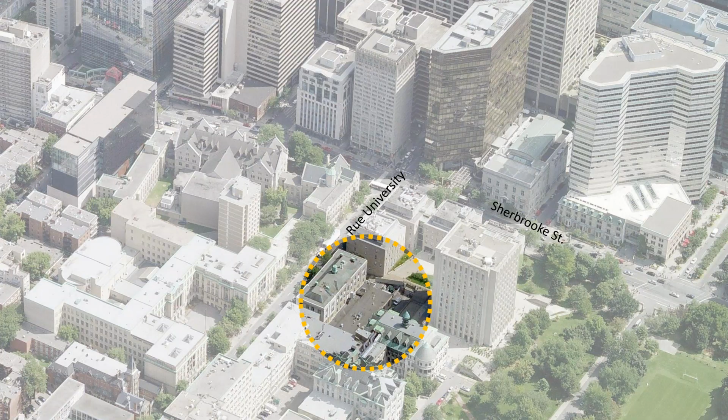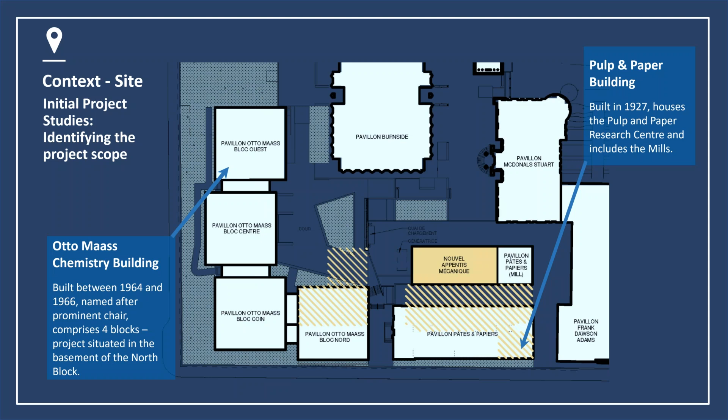This gives you an overview of what we were looking at. On the one hand we had the Otto Maass chemistry building. It's actually not a single block, it's 4 separate towers, built between 1964 and 1966 and named after a prominent chemistry chair at McGill University. Then we had the pulp and paper building, which was built in 1927, and that houses what was formerly the Pulp and Paper Research Center, including an annex known as the Mills.

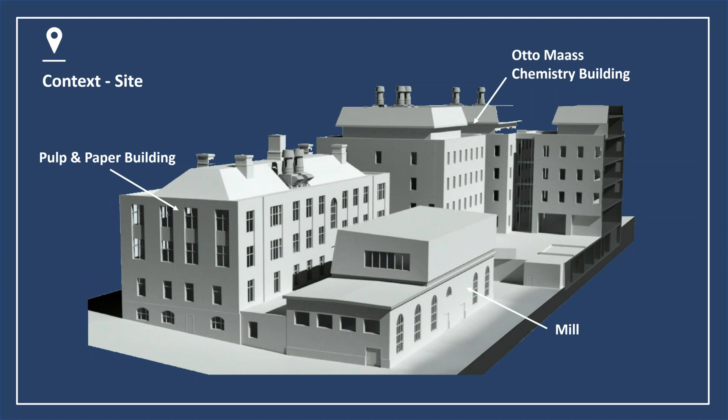So this gives you a sense of, from a volumetric standpoint, what we were looking at, the relative size and shape of the buildings. And ultimately what the issue was is that the site itself was in a valley. And so for the purposes of managing air intake and exhaust, and also the view around, it posed particular challenges in terms of how we were going to make a reasonable intervention and also ensure that the labs were interesting

livable spaces. It should be said that the space that was designated for the labs was actually on the basement level. And so in addition to the exhaust and intake issue that we were trying to deal with, we were also looking at ways of incorporating interesting daylight and view opportunities from a basement level, so it didn't feel as oppressive down there.

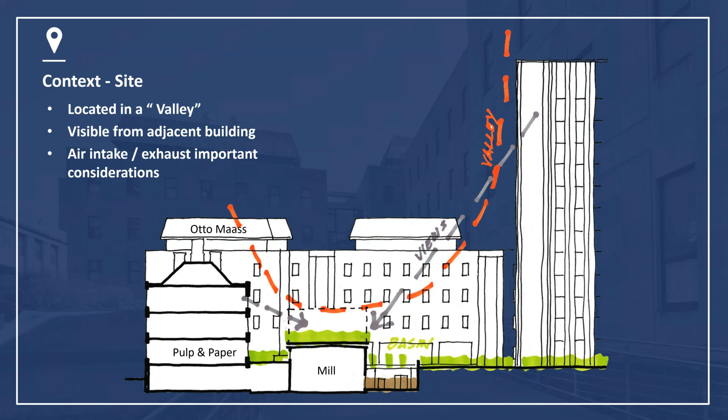The space that was allotted was the last remaining space in the building that had not been upgraded or renovated through the years. So the existing labs were in extremely poor condition. And there were more than a few deferred maintenance issues that we had to deal with. So this just gives you a quick sense of what the situation was prior to construction.

Prior to construction, this is just a general overview of what we were looking at. This is in the pulp and paper, in the Mills area, where we have one lab that had some interesting fenestration, but by and large, we were in a basement.

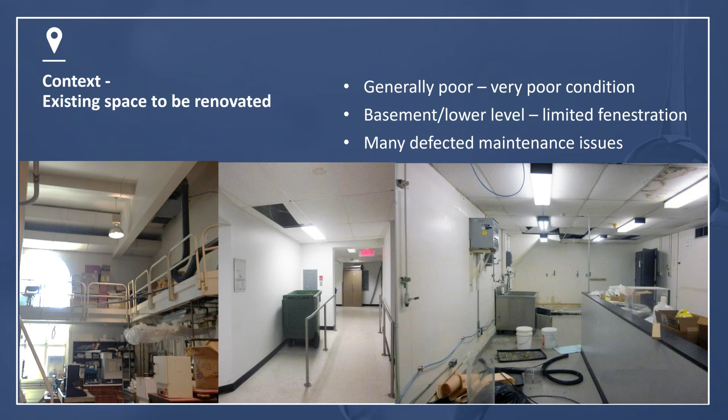So looking at the project itself, there were basically 3 areas of intervention. In the mill, we were looking at incorporating new mechanical space on the roof. We basically did a full upgrade on the exterior envelope, and it was a major renovation to the existing lab.

In the pulp and paper building, we incorporated new exhausts on the roof. There was new mechanical equipment in the existing penthouse, and new vertical distribution of the mechanical services throughout the building, focusing specifically on where the project started, the renovation of existing labs.

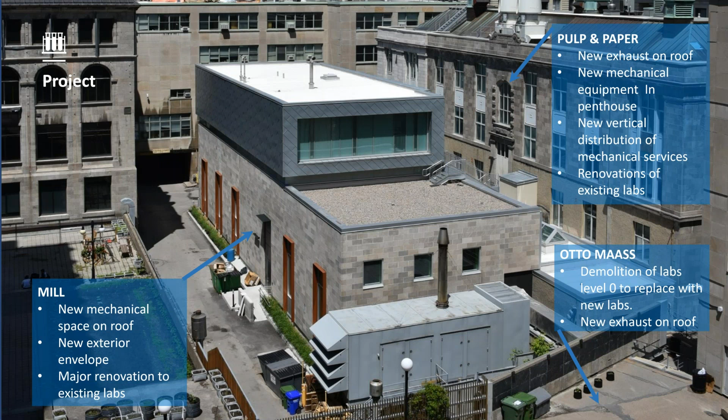And then finally, on Otto Maass, it was a wholesale demolition of existing labs on the level 0 space to replace those with new labs, and then there was the creation of new exhaust on the roof.

So in plan, just to get an orientation of where we were, this is all level 0, and so to the left, you have Otto Maass. We were basically having interventions on roughly 40% of the floor area, and then over on the pulp and paper and the mill side, we were doing a fairly significant renovation over most of the floor area.

It should be said that the challenge of this project was that the existing labs or the adjacent labs needed to be in continuous operation. So we were managing a construction site and continuous operation of wet labs throughout.

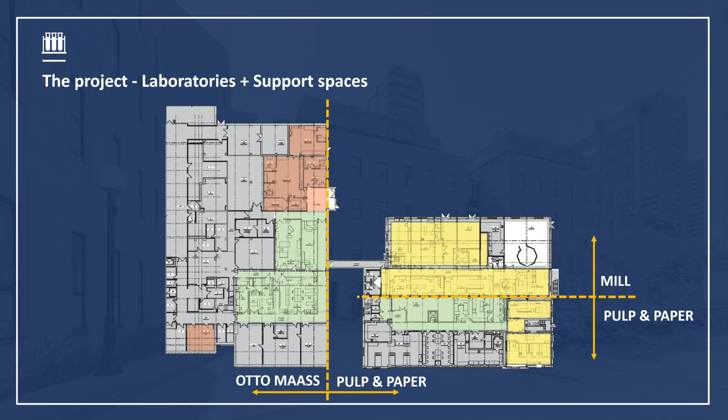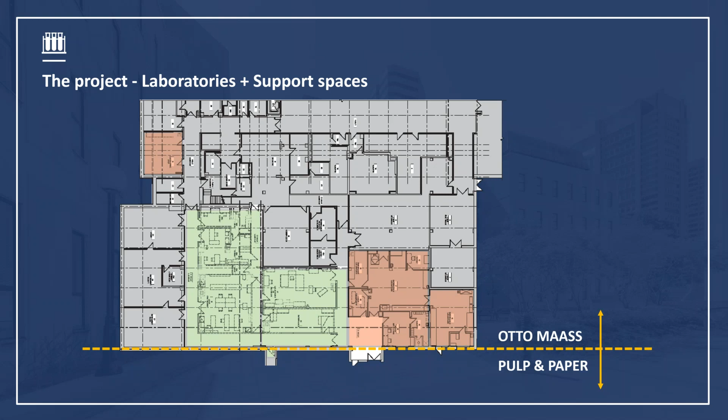More specifically, on the Otto Maass side of things, the segregation in this area was a little bit more straightforward in that the building zone versus the zone of intervention were more distinct. And so we did not have as many issues in terms of separating the ongoing use of the building with the renovation work.

On the pulp and paper and the mill side, it was much more complicated because we were touching a more significant portion of the work, and we were also intervening in areas where we were having to manage building access. And so things like dust control, proper ventilation, proper pressurization, building services, continuing with sensitive lab work directly next to a construction zone were all problematic.

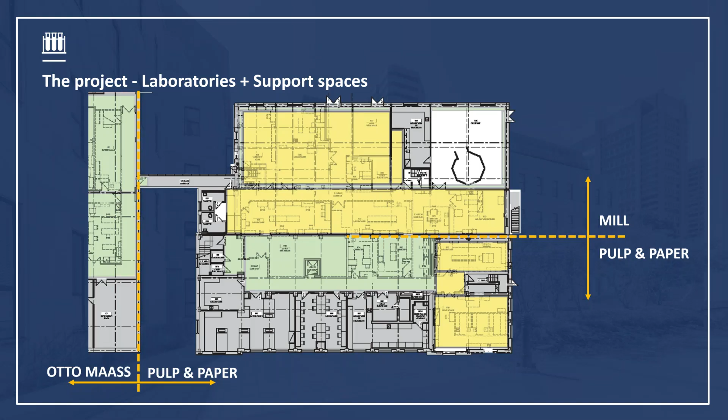There were some key project goals. We were looking for LEED Silver level certification. They were also looking to maximize energy efficiency, make sure that there was a good amount of adaptability and flexibility for the laboratory spaces. Because the lab spaces were located in the basement, ways in which we could increase the

availability of natural light. From a user standpoint, they were looking to make sure that the spaces would support interaction, which was a key goal of the research chair, promoting interior views, and there had been a hope that we would have access to vegetation and green space, which was sort of the blue sky thinking at the beginning of the project.

The challenge, because of how broken up the spaces were and where the labs were located, was establishing an appropriate LEED project boundary because we were operating in multiple zones. And so the initial strategy was to sort of delineate those zones. And in terms of the mechanical electrical systems, for the purposes of how we would approach LEED, we were simply thinking of doing a proration of the overall mechanical spaces versus the overall space.

The challenge was that while we decided to pursue LEED certification as a commercial interior, the way in which the mechanical systems were set up on campus, we had district systems that we were dealing with, and so ultimately, in consultation with the Green Building Council, we settled on a strategy of basically looking at only incorporating the terminal units as part of the LEED certification process.

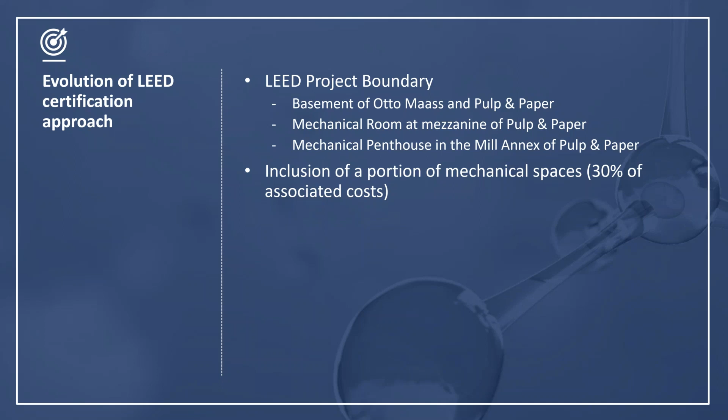The other challenge that happened along the way is that from the client perspective, this started off as a labs renovation, requiring additional services in support of those labs, but it was also seen as an opportunity to improve and to upgrade the mechanical systems throughout the building. And Pierre-Luc will get into that a little bit further later on. But ultimately, it was a bit of a domino effect in that the labs required an upgrade of certain systems, and that just led bit by bit to the overall upgrade of the systems throughout the building, which had not actually been touched throughout the many years of ongoing renovations in the building.

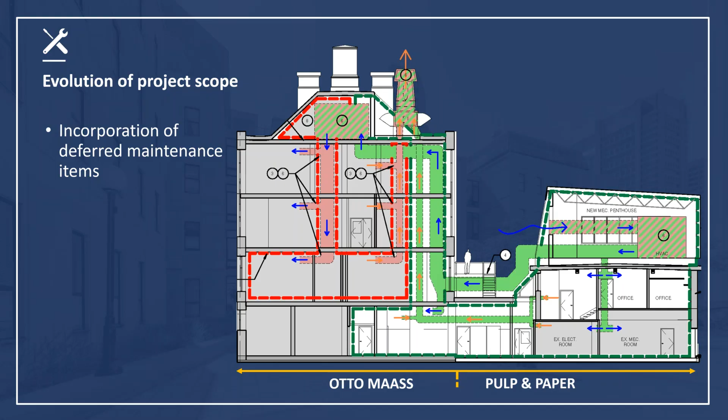So moving to looking at design strategies, natural light was our first consideration from the architectural perspective, and working with the challenge of being on the lower level, also working with the challenge of being in the valley amongst other buildings, we incorporated a skylight feature to improve the quality of the lab spaces. And so with that skylight, which is located in the link between Pulp and Paper and Mill, we were able to provide natural daylight to 85% of the lab area within the Pulp and Paper and Mill building.

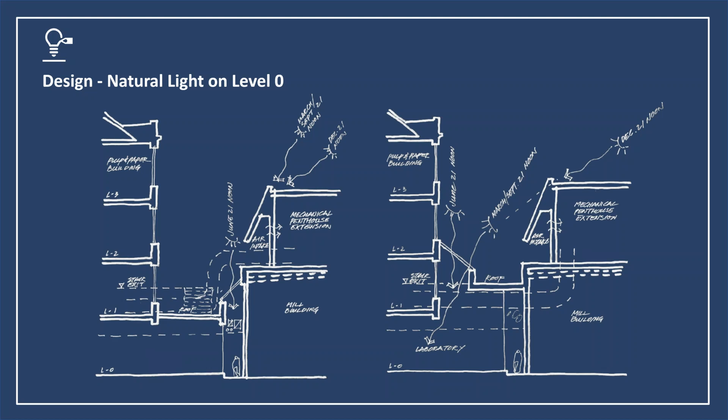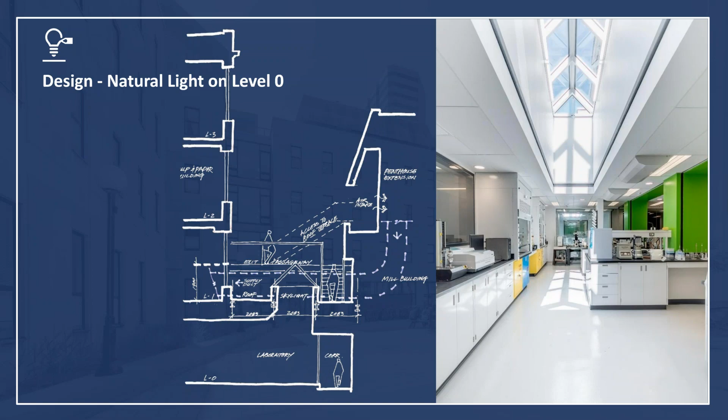We considered a similar strategy for the Otto Maass sector, and so this gives you a sense of what we were able to achieve. However, for reasons of technical and budgetary constraints, we were not able to implement it. The other issue that we had to spend a lot of time trying to assess was how we were going to manage the fresh air intake and the exhaust at the higher level. So I think I will turn it over to Pierre-Luc at this point.

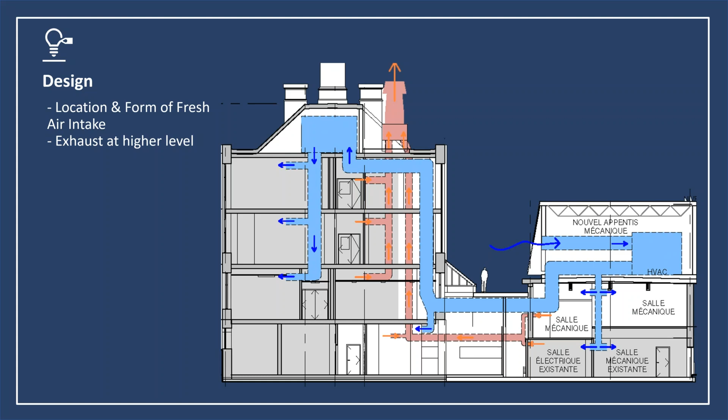Thank you, Deirdre. So in terms of electromechanical, the first thing to consider, as Deirdre mentioned, is that we needed to keep all the existing labs and offices and classrooms in the Pulp and Paper building operational during all of the work. This was really important for us. And as an analogy, it's like asking you to replace the motor of a car going full speed on the highway, and I would add on this project to replace the suspension, transmission, and even the tires. So it's quite a challenge.

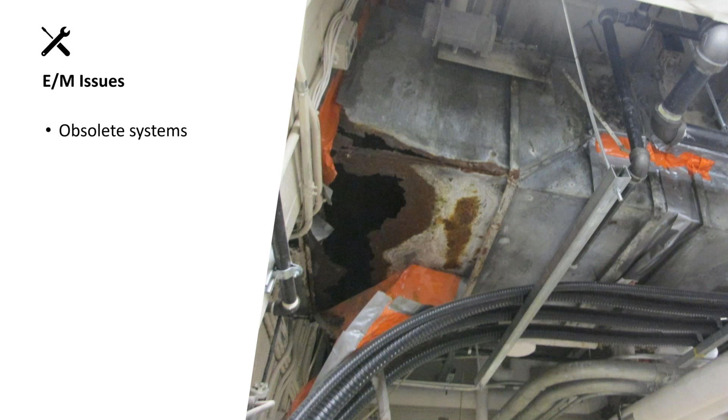Second thing, knowing that we wanted to keep the rest of the lab operational during the work, we looked at how much space is available around the existing system to try to install new elements and do a transition between the old and the new system, but it was really, really limited to some pathway in the mechanical room, and it was really, really dense, so it was not possible again to duplicate systems and do a smooth transition.

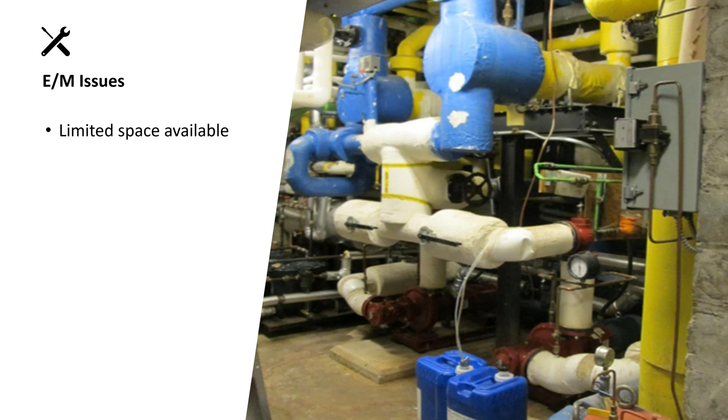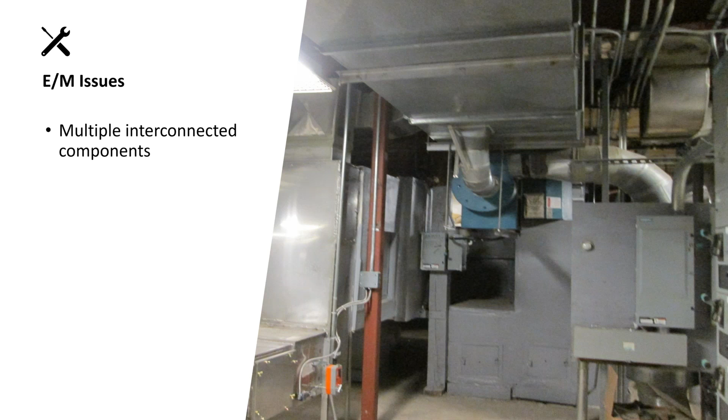Again, in terms of mechanical and electrical systems, they really were interconnected at various levels, so touching one system, stopping one system had a really big impact on a lot of space in the building, so that was quite a challenge. To have a better understanding of how the building is organized in terms of ventilation, here's a view of the building.

In terms of spaces that were kept operational, you have on the lower part in the basement a portion that was already renovated that needed to be kept. The first floor was dedicated to offices and classrooms. Second and third floor were dedicated to wet chemistry, I would say intense research labs, and also a lab that hosts some really high-end equipment like laser and optical equipment.

So the main ventilation strategy at the time was to have a central system on top in the existing penthouse, which is a multi-zone system supplying most of the building, and a secondary system supplying a portion of the basement, which was in fact the portion that we wanted to renovate. The exhaust is a bit more complicated. It's done by various exhaust fans located throughout the penthouse with no heat recovery. And these exhaust and supply go through shafts all around the building.

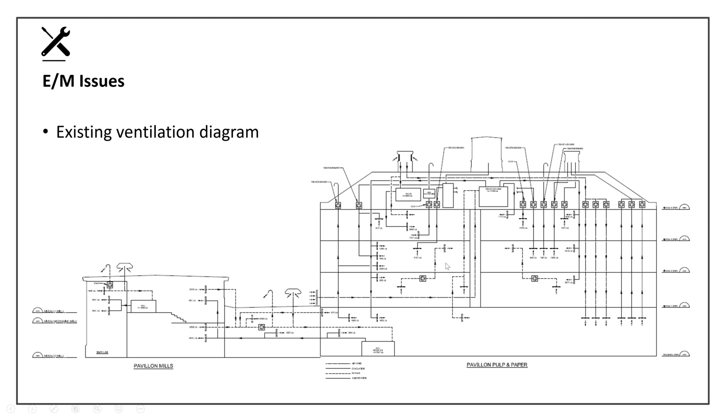Here's a view of the existing penthouse configuration, which at first seems quite generous in size, but you need to understand that all the perimeter portion is not usable at all. It's like a 1 or 2 feet high space, which is only used for pipes or small ducts. And another portion is sloped. So again, it's not that useful to install big systems. And the central portion where you see there's a lot of stuff, it's really the only portion in the penthouse that's really usable in terms of ventilation, I would say.

Just to point something out to you, the main ventilation system is in the center of the penthouse. It's a multi-zone supplying all the shafts all around the building, and the exhaust is located all around. So some are there, and you see it's quite a micmac of systems in the penthouse.

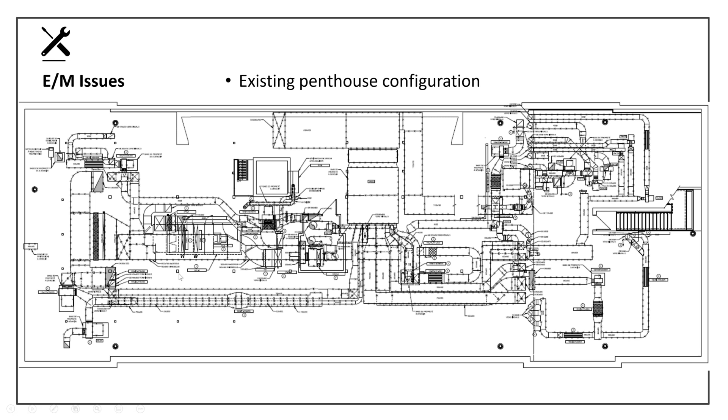The basement here that you can see, you have the central mechanical room, which is in the middle of the floor. You have the ventilation unit, which is stuck between, I would say, 3.5 walls. So there's not much possible expansion there. You have the electrical room feeding the normal and emergency power in there. All of these labs were already renovated. The rest would need to be renovated. And this is the NMR zone that we will talk a bit more about later on.

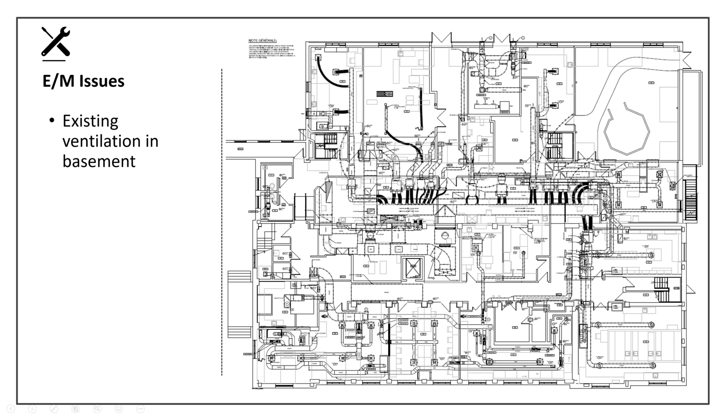And there's also a mechanical room there, which hosts the vacuum system and a purified water system that was installed a couple of years prior to the project, feeding all the labs of the complex. In terms of services, the red dots show you the services coming from around the building. The red dot on the lower portion is the water entrance from the city, supplying the domestic and lab water for the building, and also the sprinkler. And there's also the gas entrance there.

On the left portion, you have mainly the chilled water for the building. On the upper portion, you have a bit more elements. You have the steam and the condensate return water for the heating of the building. You have the compressed air to use in the lab, and you also have the electrical going to the electrical room. And these come from other buildings around the pulp and paper.

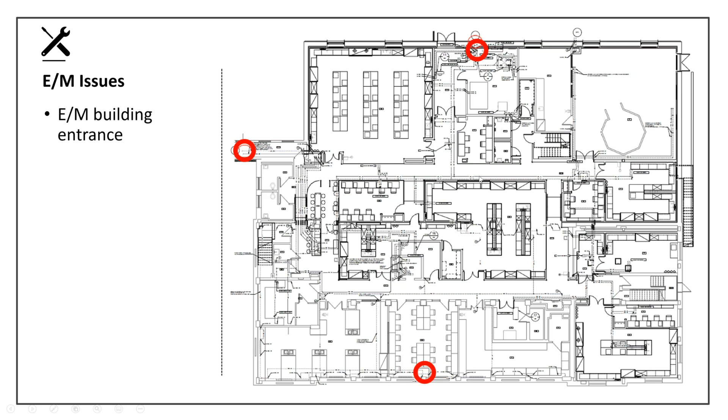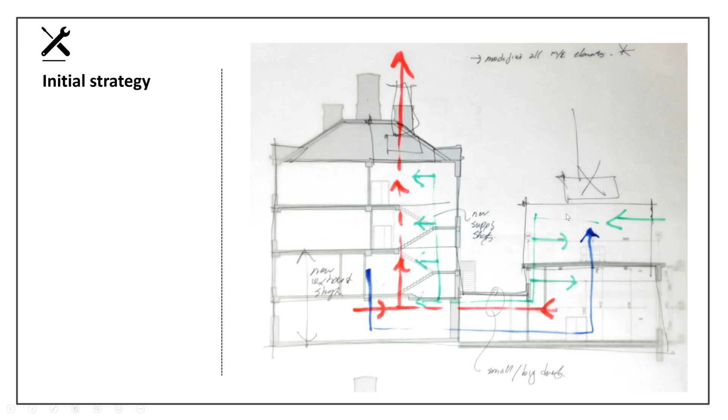So our initial strategy, knowing that there was not enough room, that we couldn't reuse the system and that there was not enough room to install something beside the existing system, we wanted to add a new penthouse, as you've seen on the picture before. So the idea was to build over the mill portion, either by installing equipment on top or inside, and having the exhaust on top of the higher portion, and try to resupply the building by the new penthouse.

At the conceptual phase, we elaborated a bit. We realized that it was not possible to keep the mill and reinforce it sufficiently to have a new mechanical penthouse. So we decided to demolish and reconstruct all of the mill, giving us the opportunity to build a better mechanical room and having also better labs at the same time.

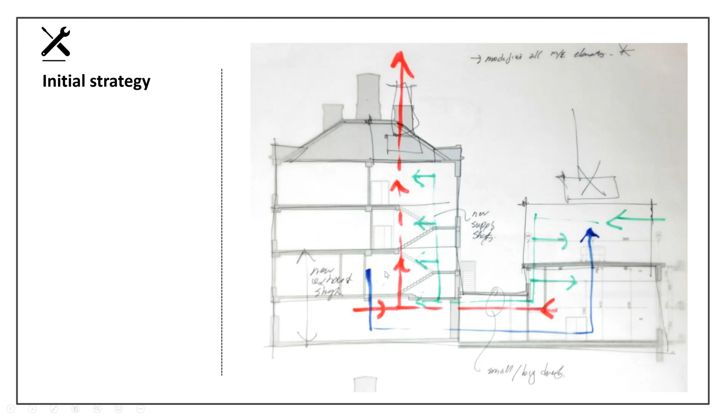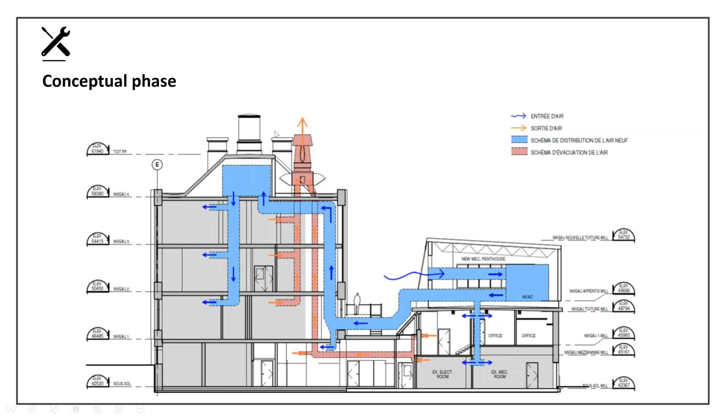So the strategy was to have the main ventilation unit with the air intake located on the interior, the main supply unit supplying the basement, being able to go to the penthouse and reconnecting all the ducts for all the other labs and offices of the building, and having the exhaust fan located on the roof, opening up the penthouse a bit so these exhaust fans wouldn't be too high compared to the existing elements, which was an important element with the regulation from the city, not to get higher than the existing elements on the roof.

The phasing was quite important in this project to keep the existing labs operational. As you've seen, the supply was there before with all of the exhaust. So by starting to construct the mill portion and the new mechanical room, we were able to install the supply of all the building, reconnecting the basement first, and then floor by floor, reconnecting one floor at a time with the existing shaft, but with new ducts coming from downstairs instead of up.

So during a weekend, there was a shutdown. We would install the duct, cap it up, connect the floor, and then the floor would be fed by the new system. A couple of weeks later, we'd do the same on the second floor and then the third floor, giving us enough room to then start to work in the mechanical penthouse on top.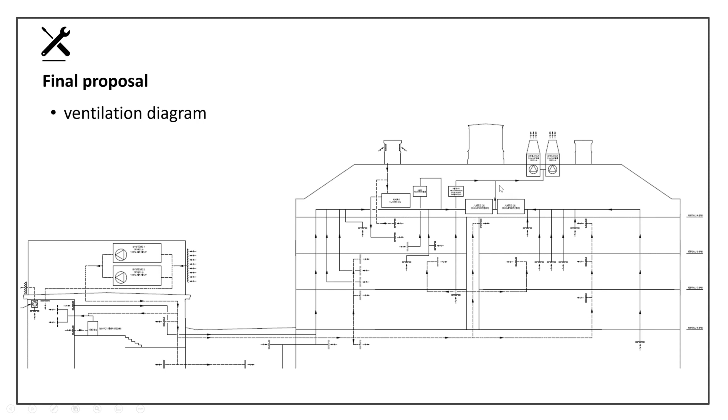Here's a view of the new penthouse in the mill. You have the ventilation systems, which are the bigger components. All the pumps, heat exchangers, heat recovery devices to supply the system, and also the hot water for labs and domestic production.

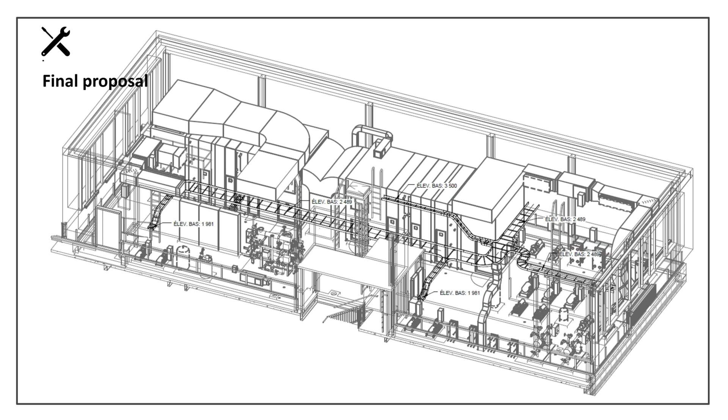Here's a view of the room. Underneath the mechanical room, you also have the new electrical room for the building, which also needed to be redone by adding more space, because we were not able to work in the existing one and keep the existing feeds to every lab in the building. And there was also not enough capacity to supply all the new systems.

Here's a view of the existing penthouse on top of the pulp and paper. So that's the final layout in terms of ventilation. So as you've seen, the existing supply system was there. So by reconnecting everything on the new system, we were able to make just enough space to demolish the penthouse there and install the exhaust fan.

Then we were able, as another phase, to temporarily reconnect all of the exhaust from the shaft to the fan with no heat recovery. That permitted us to demolish the existing fan and clear all of the rest of the mechanical room. So we were able to install the heat recovery unit and then finally reconnect the systems as they should be.

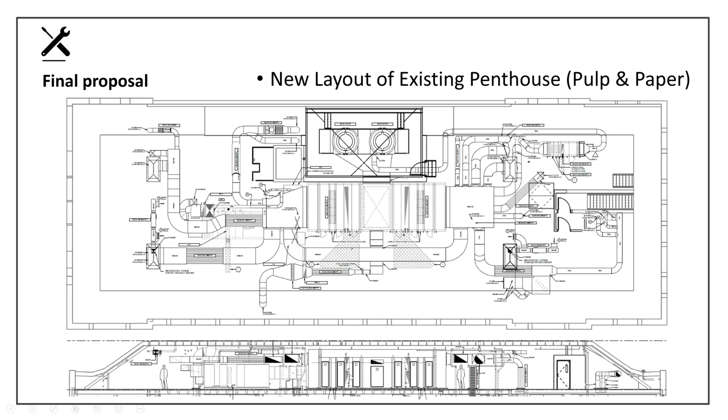You can see a view of the building showing you the proportion of the system compared to the space, with the slope also, and the slopes are there on both sides. So it's quite tight there, but I think it's better than it was. So here's the view of the final installation, I would say, with the exhaust fan.

And also, what I told you was that we demolished the penthouse in a portion. So this became an exterior portion with a roof instead of having the penthouse going with a slope there. So that permitted us to install the fan a lot lower than if we installed it on top of the penthouse.

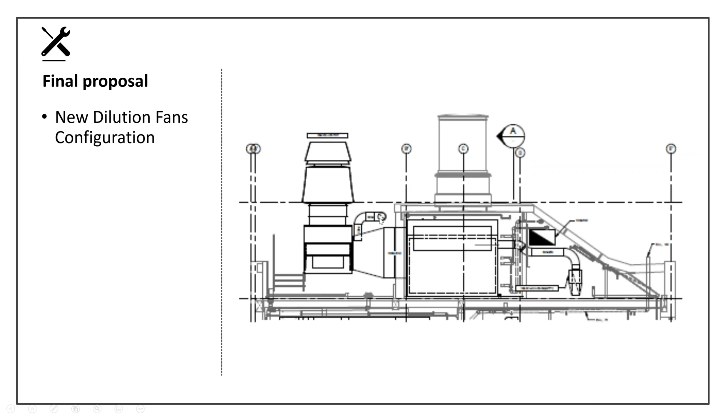Right, and so as Pierre-Luc explained, the original intent had been simply to install the new mechanical systems as required above the mill annex. And so at the start of the project, we set about a strategy of reinforcing the existing structure. And that initial decision was taken because we had the NMR, and in an initial run, they wanted the NMR to remain operational during construction.

However, that was taken off the table fairly quickly. And then subsequently, it was a question of being able to protect the equipment adequately. So the intervention on the mills was meant to be sort of an incremental intervention.

Upon further investigation and looking at the initial drawings and the conditions, as well as the current building code requirements, it was rapidly determined that that was not feasible and that we would have to do a wholesale demolition and reconstruction of that annex in order to be able to provide the adequate space for the mechanical system. And that also was an opportunity, as Pierre-Luc mentioned, to improve the remaining labs, or the major lab space, the instrumentation lab for the green chemistry.

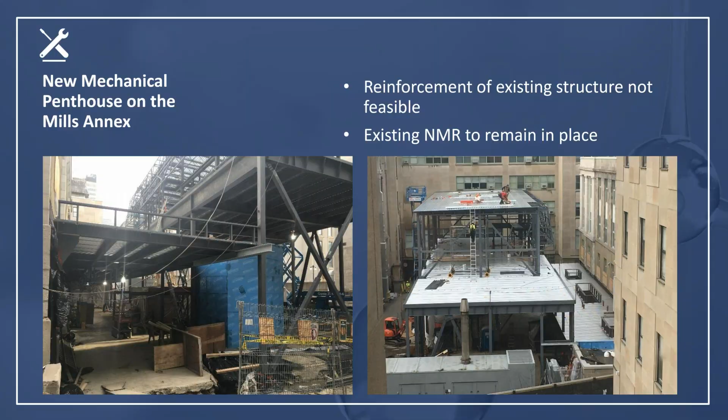So that leads us into sort of our results and observations in terms of looking back on the project. And so we've alluded to it many times, that one of the big challenges of the project was the fact that, contrary to previous renovations that had occurred in Otto Maass over time, where you were looking at renovating sectors or renovating floors, this was one which was basically the lab spaces that were left over and on level 0. And so it really was a piecemeal approach that made the whole process from both the design and the construction perspective much more complicated in terms of implementing it in the most ideal way.

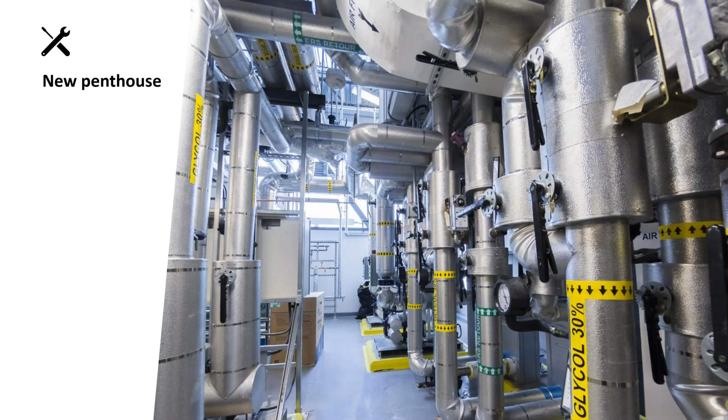Certainly, being able to ensure that the adjacent labs were optimal, both in terms of their access, and in terms of the ventilation and the mechanical systems, was an ongoing challenge, both as we were planning it out in terms of the phasing, but also as it was being constructed out. We've already alluded to a little bit about the NMR. I'll let Pierre-Luc speak a little bit about the penthouse.

So here's the result in the new penthouse. As you can see on the back, we convinced the architect to install glazing in the mechanical room. So we had some light there, but also it gave a view from the site to people walking around the building, to have a glimpse of what's required to support labs.

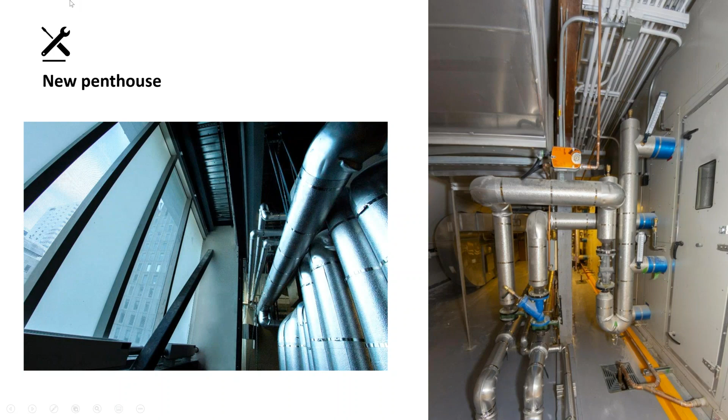On the right, you have the existing penthouse on top with the slope ceiling. These are the heat recovery system in terms of ventilation and the piping. So it's quite tight, but again, I think it's a lot better than it was.

Here's a view again of the same mechanical room, where you can see the slope on both sides, with all the ducts of the exhaust going from all the shafts all around. As you can see in the back, you have multiple ducts going to various shafts in the building that needed to be reconnected and kept operational during all of the construction.

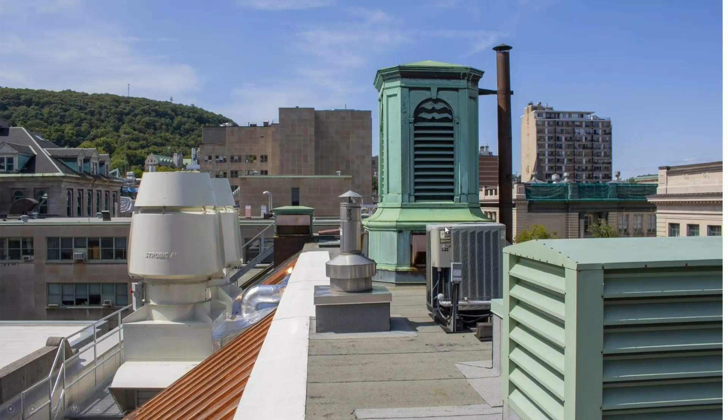Here's a view from the roof where you can see the exhaust fan compared to the existing element, and you can understand how it was opened up so it would be integrated and also less visible from the city and the campus. From the city side, it's really not visible at all, and from the campus side, it's still visible, but it's incorporated and not as massive as it would be if we had just put it on the roof.

One of the things that had been asked for in the initial project was access to vegetation. Initially, because of the location of this project as part of a valley, visible from all the buildings around, the thought had been to incorporate some aspect of a green roof. It had been looked at that this lower portion would be a green roof, with a connection down to the terrace and the main quad area.

Unfortunately, those are the things that people dream about. But there was always this notion of trying to make the lab, this project, an opportunity to create more livable space.

In addition, one of the other issues that came up is that in the full reconstruction of the walls, which had not been the original plan, there was now the opportunity to really improve the building envelope. Before, we were trying to adapt the old stone and masonry walls, but we really had an opportunity to improve the building envelope. Navigating both the city and the McGill architectural approvals process was a bit of a challenge, but I think everyone is ultimately happy with the result.